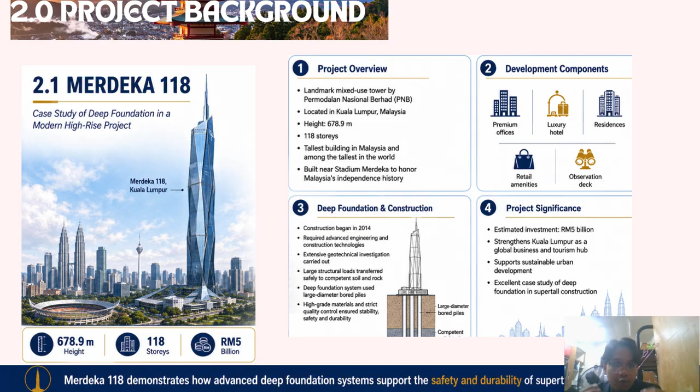They required high grade material and strict quality control to ensure the stability of such a large building. For the project significance, the estimated investment is around 5 billion. It helped strengthen Kuala Lumpur as a global business and tourism hub and supports sustainable urban development. This type of building is truly excellent to be used as a case study of deep foundation in supertall construction.

Thank you, Syahmi. My name is Muhammad Faris bin Rul Hisam. I will present the case study of Jambatan Bukit Tuku, Batu Hampar, a bridge replacement project located in Pasir Mas, Kelantan. This project was initiated by the Malaysian government through JKR to replace the existing bridge and improve safety, reliability, and route connectivity. It is part of the government's effort to upgrade transportation infrastructure in rural areas.

The scope of the project includes demolition of the old bridge, construction of a new bridge, foundation works, earthworks, drainage improvement, pavement construction, road upgrading, and utility relocation. This will ensure a complete and durable infrastructure system.

Because the site has challenging soil conditions, a deep foundation system is required. The structural load from the bridge is transferred safely to stronger soil or rock layers using deep piles. Therefore, proper geotechnical investigation, foundation design, and strict quality control are very important during construction.

The project brings many benefits. It improves transportation access for residents in Pasir Mas, reduces travel disruptions, enhances road safety, and supports local economic activities. It also shows how modern construction technology and deep foundation systems are essential in bridge engineering.

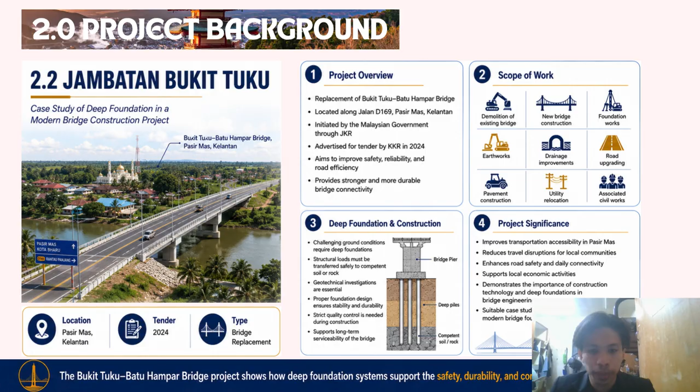So I will briefly present the parties involved in the two major projects, Merdeka 118 and Jambatan Bukit Tuku. For Merdeka 118, the client is PNB Merdeka Ventures Sendirian Berhad. The civil and structural works are led by consultants such as Leslie E. Robertson Associates, Robert Bird Group, Arup Jururunding Sendirian Berhad.

Mechanical and electrical engineering is handled by Val Lehr and Associates and KTA Tenaga. The quantity surveyor is JUBM Sendirian Berhad, while the main contractor is Samsung C&T Corporation in joint venture with UEM Construction. The project is managed by Turner International Malaysia.

In conclusion, both projects involve coordinated collaboration between government bodies, consultants, and contractors to ensure successful delivery.

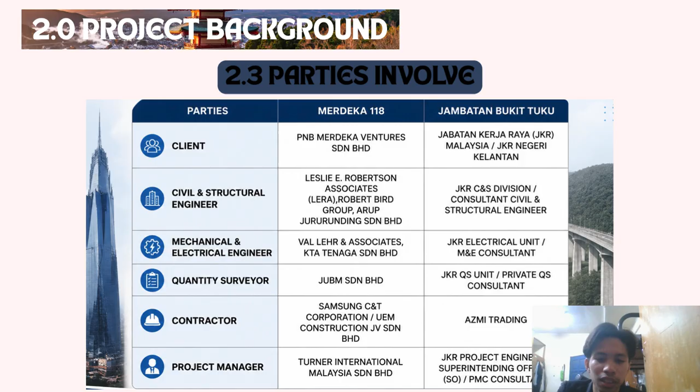Thank you, Faris, for your detailed and comprehensive explanation of the project background for the ongoing project. Now, let us move on to the case studies section, and we will begin by talking in much more detail about the complete project for Merdeka 118.

Okay, for this one, let us begin by talking about the type of pile used for the project. Merdeka 118 used a piled raft foundation with 136 large diameter bore piles, meaning the building is supported by both a thick concrete raft and many bore piles. The raft spreads the building load evenly, while the piles transfer the load deep into strong rock.

Besides that, the diameter of the pile is 2.2 and 2.4 meters. The piles are very large because Merdeka 118 is one of the tallest buildings in the world. Large piles can support much heavier loads compared to normal building piles.

Besides that, the depth of the pile is around 52 to 60 meters. The piles extend deep underground until they reach strong bedrock. This ensures the building remains stable and prevents excessive settlement.

You may be wondering, why bore pile? Bore piles were selected because they create less vibration and noise than driven piles. This is very important because Merdeka 118 is located close to Stadium Merdeka and Stadium Negara, where excessive vibration could damage nearby structures. Okay, now let's move on to the next point, and that is design consideration.

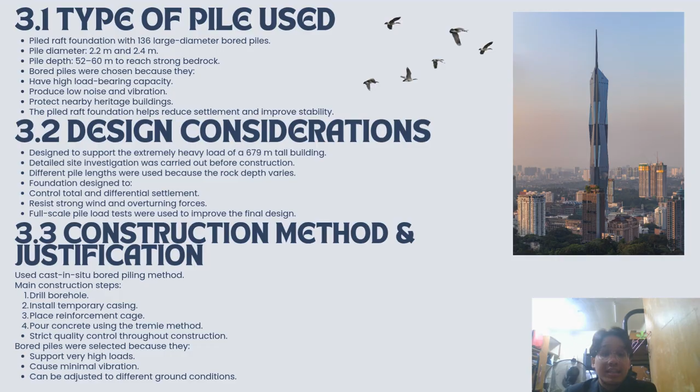Moving on to the next construction method and justification, tremie concreting. Concrete is poured from the bottom of the hole using a tremie pipe. This prevents the concrete from mixing with groundwater or drilling slurry and ensures better concrete quality.

Okay, now let us move on to the material used in this project. The first material is high strength concrete. Concrete carries the heavy compressive load from the building and provides long-term durability.

Moving on to the second point, high-yield reinforcement steel. Steel reinforcement strengthens the pile by resisting tension, bending, and shear force.

Moving on to the third material used, temporary steel casing. The casing prevents the borehole from collapsing during drilling and helps maintain the correct pile shape.

For the fourth material, bentonite or polymer slurry. This drilling fluid keeps the borehole stable before concrete is poured.

Last but not least, the most important point in order to ensure that the material used is in top form is none other than quality control. For this one, all materials were tested to ensure that they met the required strength and durability standards for this project. Okay, now let's talk about the equipment and machinery used for the deep foundation for this project.

Okay, for the first machinery used, rotary drilling rig. This machine drills the deep and large diameter hole required for the bore pile. Second machinery used, crawler crane. The crane lifts heavy reinforcement cages and temporary casing safely into the borehole.

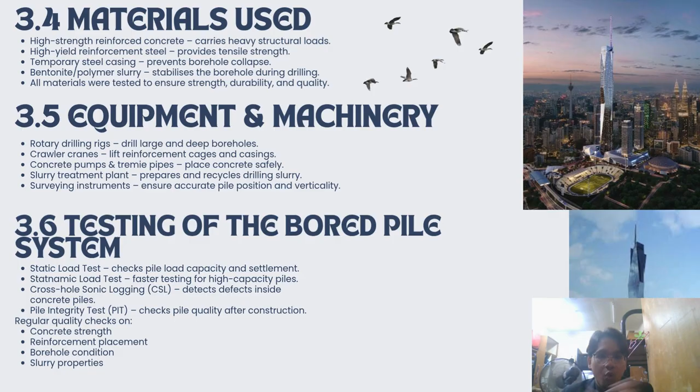Merdeka 118 uses a deep bore pile foundation system to support its massive structural loads and overcome Kuala Lumpur's challenging karstic limestone geology.

Large diameter bored piles transfer the building load safely to strong limestone bedrock, providing higher load bearing capacity and minimizing settlement. The rotary Kelly drilling method also produces less noise and vibration than driven piles, making it suitable for urban construction. Overall, the bored pile system ensures long-term structural stability, safety, and durability.

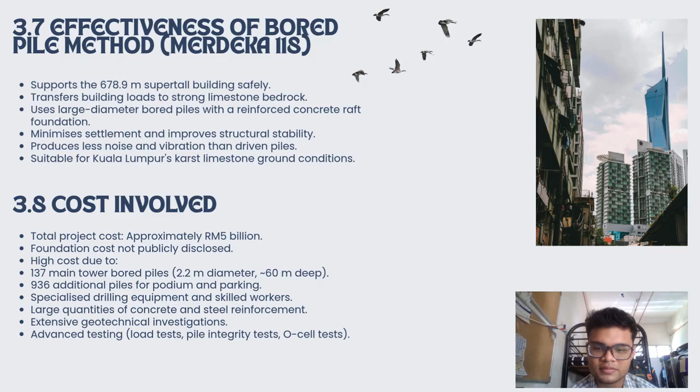For the cost involved, the deep foundation works are among the most expensive parts of the Merdeka 118 project due to its height, complex ground conditions, and specialized construction methods. Although the total project cost is around 5 billion, the exact foundation cost has not been disclosed. The high cost is mainly due to construction of over 1,000 large diameter bored piles, intensive geotechnical investigation in karstic limestone, and use of specialized equipment such as rotary kelly drilling rigs, polymer drilling fluids, tremie concrete, and heavy cranes. Comprehensive quality testing includes load test and pile integrity testing to ensure the safety and performance of the foundation.

So this is the Jambatan Bukit Tuku Batu Hampar project in Pasir Mas, Kelantan, which is an ongoing project for our case study. Next, I will explain in detail how a strong foundation is made for this project for long-term infrastructure durability.

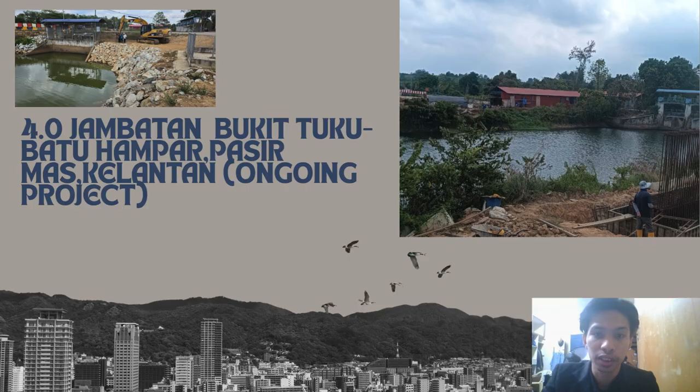First, the type of pile used in this project is a large diameter bored cast-in-situ reinforced concrete pile with a diameter of about 1,200 mm. Each pile is designed to carry a working load of around 6,500 kN. In total, 30 piles were installed at abutment A and 41 piles at abutment B. These piles are made using high strength concrete grade C32/40 and reinforced steel.

One important feature is that sonic logging tubes are included, which allow engineers to check the quality of the concrete inside the pile after construction. These piles were selected because they are very suitable for heavy bridge loads and varying soil conditions, especially in river areas. They also produce low vibration and noise, which is important to protect surrounding structures and the environment.

Next, in the design considerations, the piles are designed to resist different types of loads, including dead load, traffic load, wind load, and also flood or hydraulic force. Since this is a bridge over a river, flood effects and scour are very important factors.

The piles help transfer all structural loads down to stronger soil or rock layers. Engineers also carefully design the number of piles based on how the load is distributed. The main aim is to reduce settlement, avoid uneven movement, and ensure long-term stability of the bridge.

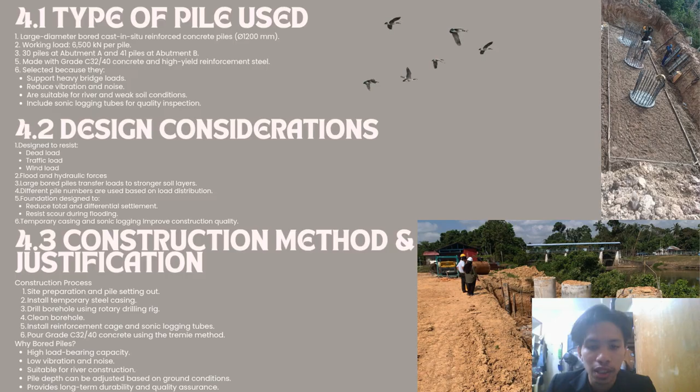After that, the reinforcement cage and sonic logging tubes are installed. Finally, concrete is poured using the tremie method to ensure the concrete is placed properly underwater or in wet conditions without segregation. The reason bored piles are used is because they provide high load bearing capacity, low vibration, suitability for river construction, adjustable depth based on soil conditions, and long-term durability. This ensures the bridge foundation is strong, safe, and durable for long-term service.

So I will continue with section 5. First, for material use, the main material is C32/40 concrete, which provides high compressive strength and long-term durability. This is important because the pile must support very heavy bridge loads. In addition, high-yield reinforcement steel is used to resist tension and bending forces.

Inside the piles, temporary steel casing is also used during drilling to stabilize the borehole and prevent collapse. Furthermore, sonic logging tubes are installed inside the piles to allow quality inspection after concreting. Overall, these materials ensure structural strength, corrosion resistance, and long service life of the foundation system.

Next, for equipment and machinery, several specialized machines are required. A rotary drilling rig is used to drill boreholes with a diameter of around 1,200 millimeters. A crawler crane is used to lift and install the reinforcement cage and steel casing. A concrete pump with tremie pipe system is used to place concrete continuously without segregation, especially under wet or underwater conditions. A transit mixer truck supplies fresh concrete to the site. In addition, surveying equipment is used to ensure correct pile position and vertical alignment, while CSL testing equipment is used for quality inspection of completed piles.

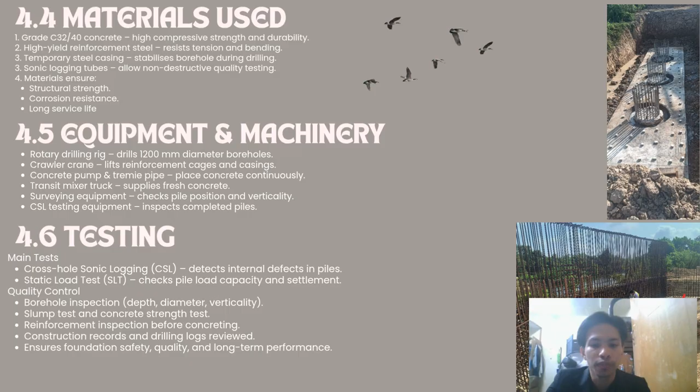In conclusion, the combination of high quality materials, specialized equipment, and strict testing ensures that the foundation system is safe, strong, and able to perform well for long-term bridge stability.

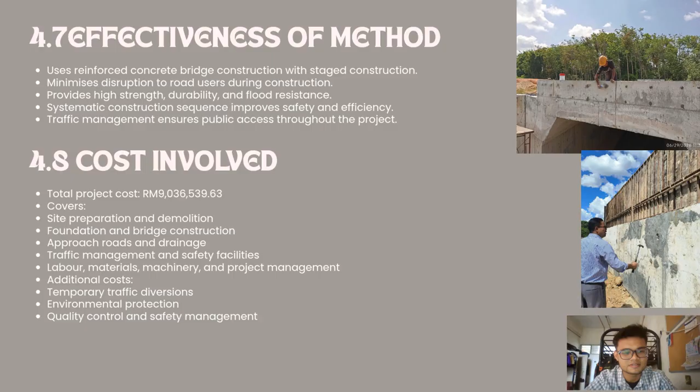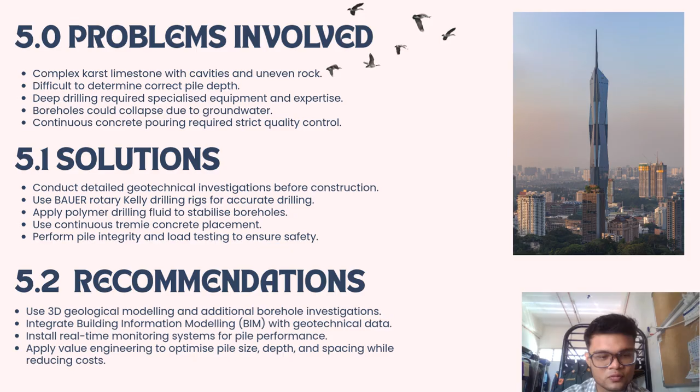Integrating building information modeling (BIM) with geotechnical data can improve coordination and reduce construction errors. Real-time monitoring systems should also be installed to detect structural settlement. In addition, applying value engineering can optimize depth and spacing to reduce construction costs while maintaining structural safety.

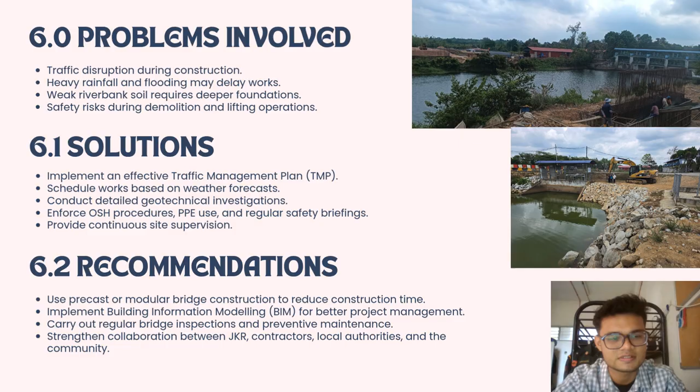The use of building information modeling (BIM) can also enhance project planning, coordination, and progress monitoring. After completion, regular inspection and maintenance should be carried out to extend the bridge's performance and reduce long-term maintenance costs.

Now I will explain the comparison between the Merdeka 118 Tower project and the Bukit Tuku Bridge project. First, let's look at the similarities in construction method. Both projects use the same bore pile foundation system because it is suitable for supporting heavy structural loads. They also follow the same construction sequence, starting with rotary drilling, followed by reinforcement cage installation, and finally concreting. In addition, both projects use reinforced concrete and steel reinforcement together with heavy equipment such as rotary drilling rigs, cranes, and concrete pumps. Strict quality control and testing were also carried out to ensure the strength and safety of the foundation.

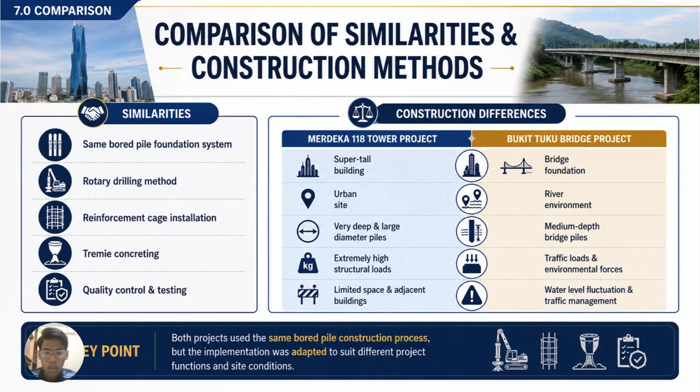However, there are several differences. Merdeka 118 is a super tall building located in an urban area, so it required deeper and larger diameter bore piles to support extremely high structural loads. In contrast, the Bukit Tuku Bridge project was constructed in a river environment, where construction had to consider groundwater, river conditions, and traffic management. Overall, although both projects used the same bore pile construction process, the implementation was adapted according to project requirements and site considerations. Next, let's compare the performance and overall effectiveness of both projects.

For Merdeka 118, the bore pile foundation provides a very high load-bearing capacity to support one of the tallest buildings in the world. It also ensures excellent structural stability, long-term durability, and high safety performance by reducing settlement and maintaining structural integrity. Similarly, the Bukit Tuku Bridge foundation supports the bridge structure, traffic loads, and environmental forces such as river flow and soil movement. The foundation is also designed for long-term durability and safe operation throughout its service life.

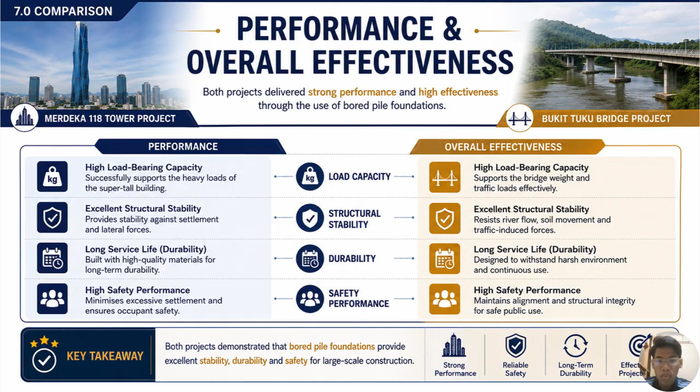Overall, both projects successfully achieved their objectives. The bore pile foundation system proved to be reliable, durable, and suitable for different types of large-scale construction projects.

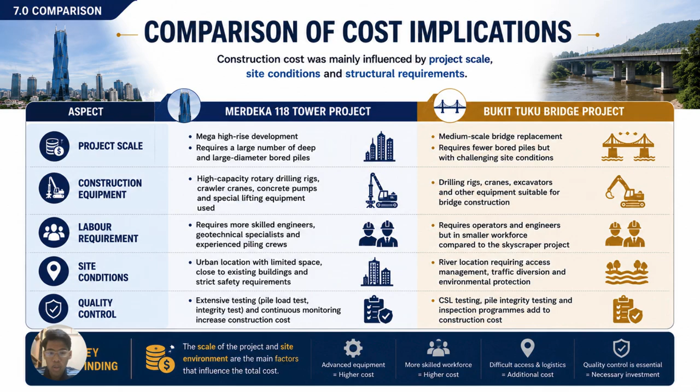However, additional expenses were required for river access, traffic diversion, environmental protection, and water management during construction. Both projects also invested significantly in quality control and testing to ensure the foundation met safety and performance requirements. In summary, project scale, site condition, and structural requirements were the main factors influencing construction costs.

Merdeka 118 was built in a dense urban area and designed to support extremely high structural loads, making it more technically challenging and more expensive. In contrast, the Bukit Tuku Bridge project focused on overcoming river conditions, groundwater, and traffic management while maintaining a stable bridge foundation. Overall, this comparison demonstrates that bore pile foundations are highly reliable and adaptable. They can be successfully applied to different types of construction projects by adjusting the design and construction method according to project requirements.

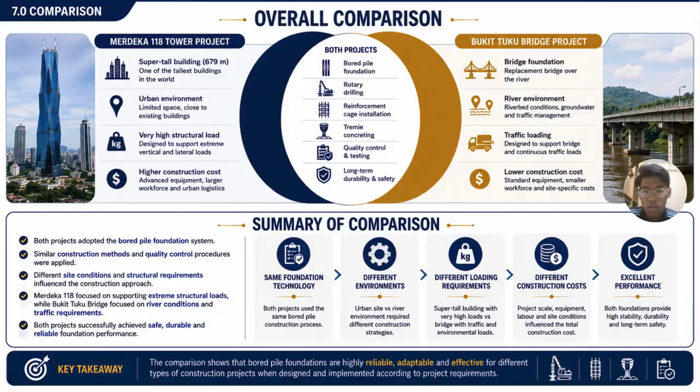In conclusion, the study shows that foundation systems are very important in construction, especially for heavy structures and weak soil conditions. Both Merdeka 118 and the Bukit Tuku Batu Hampa Bridge use bore pile foundations to ensure strength and stability. From this assignment, we understand that proper design, good material, advanced methods, and strict quality control are very important for safe construction. In addition, site investigation and testing help ensure the foundation can safely transfer loads and reduce settlement.

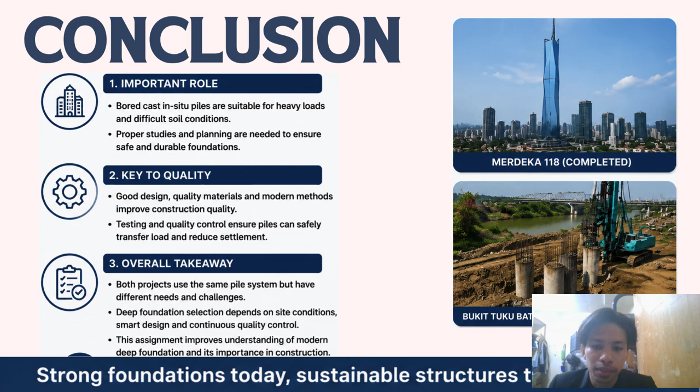Overall, deep foundation selection depends on soil condition, design requirements, and construction method. This study improves our understanding of how deep foundations support safe, durable, and sustainable infrastructure. That's all for our group.